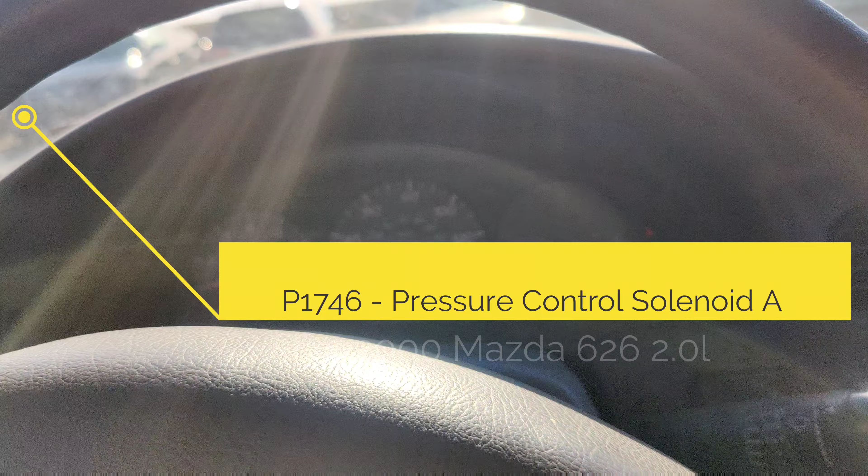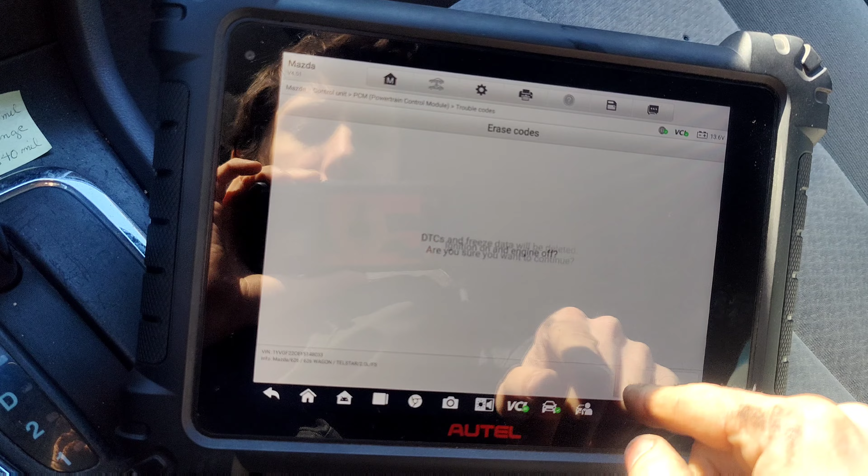Got this 2000 Mazda 626 and it got this P1746. I want to clear this code. This circuit open. I was doing some research online and I think this can be caused by a shifter issue. Well, not shifter, but like a position issue. Let's see.

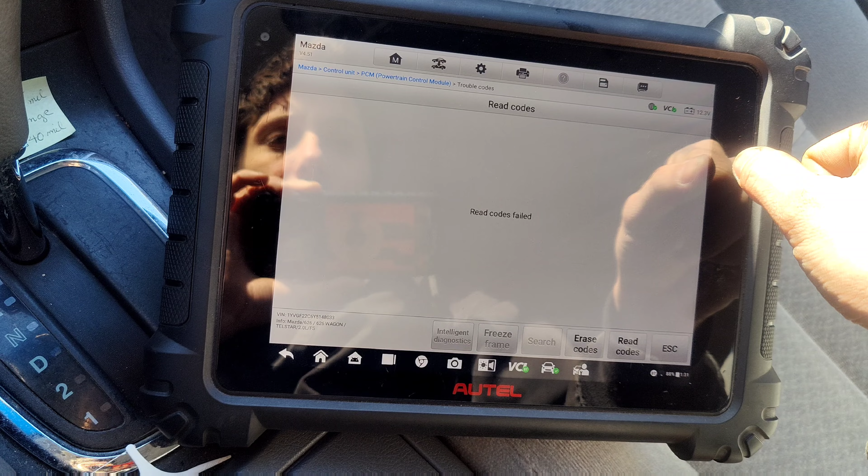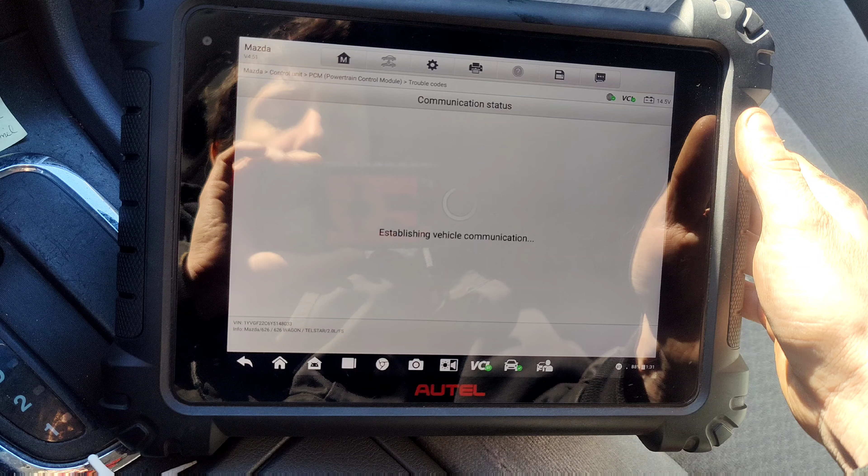Why did that fail? Oh, read codes failed. Let's see. That's weird. Let's try this again. Maybe I'll have to change scan tools. That's weird.

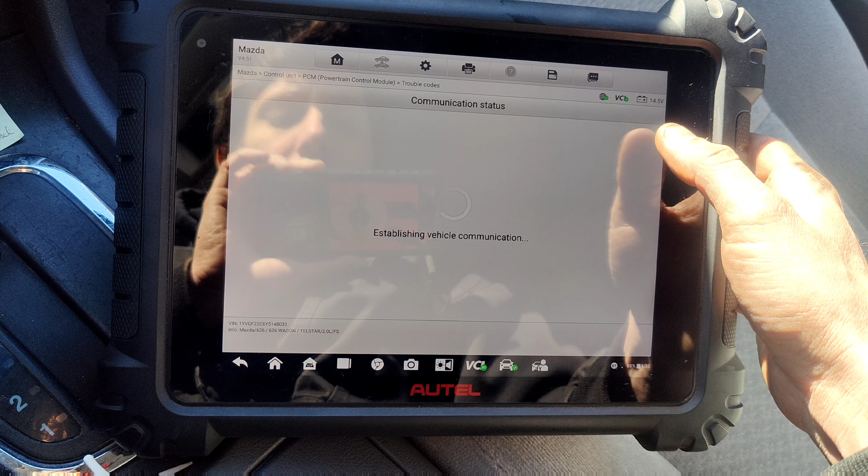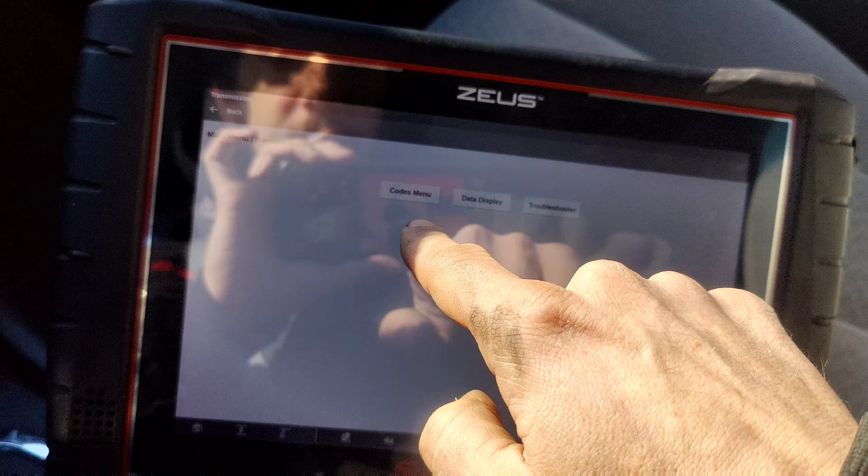Okay, let me change to the Snap-on. Snap-on actually gives me transmission. So it says no codes are set in the transmission. Just go back, check the engine. Codes. Memory codes. No codes. Okay, sorry about that. You guys are gonna have a glare because the screen's so reflective on these.

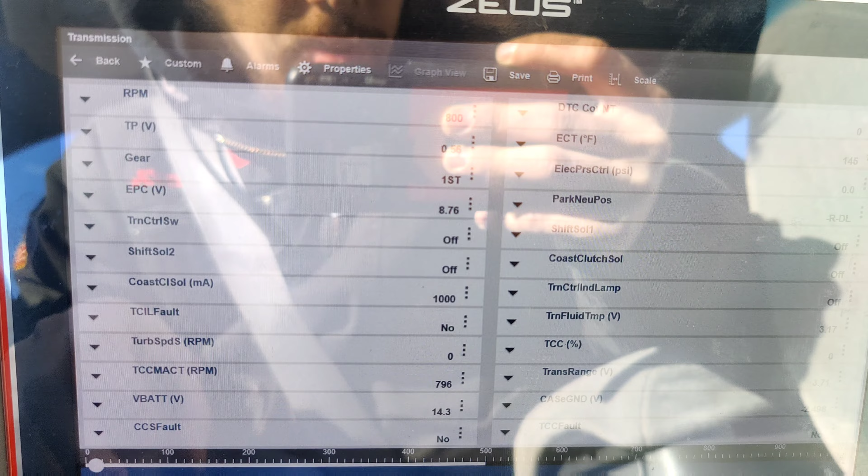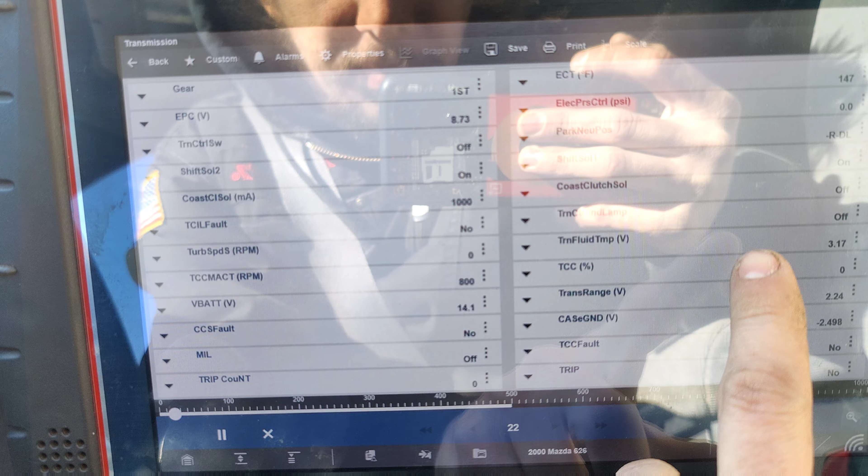Let's just go back. Let's go to transmission. Data. Let's see. Focus. I want to log the range switch if we can see it. Park neutral. Okay, so it does show that, let's see. There is a trans range voltage right here.

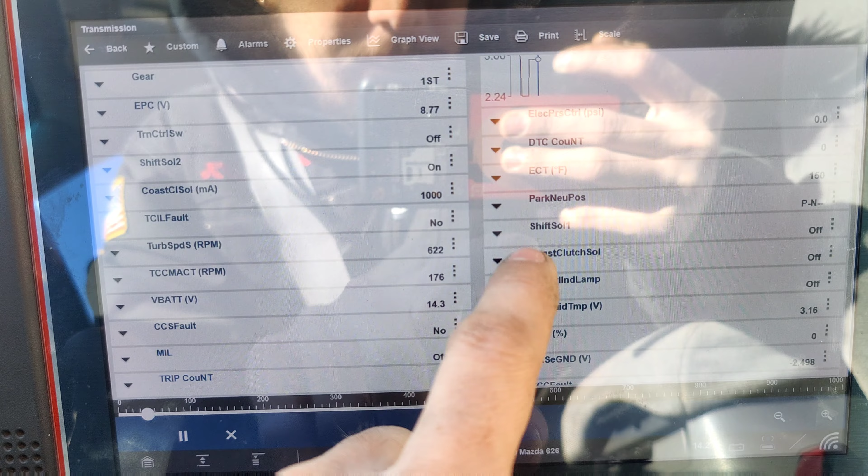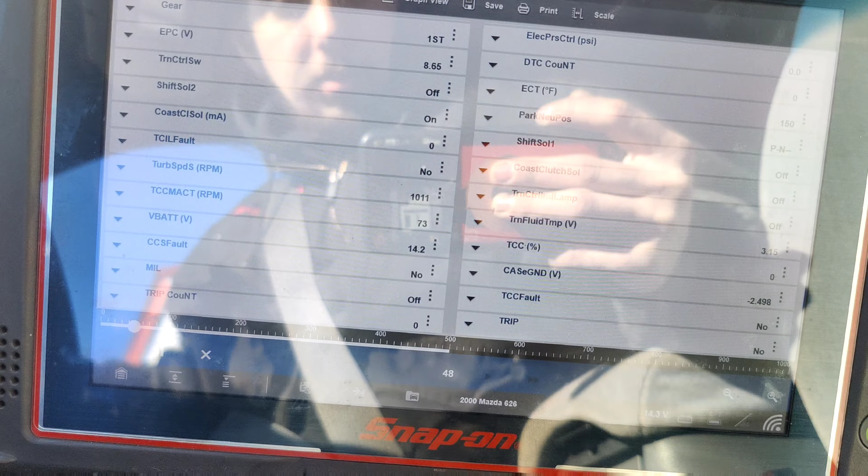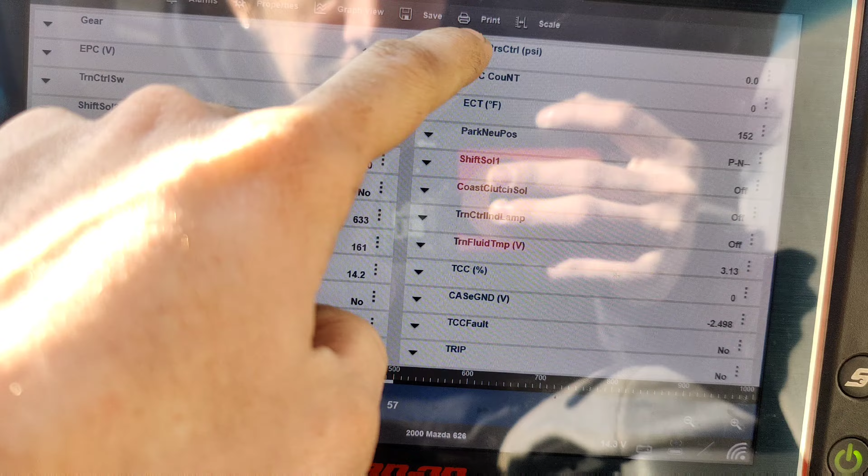I don't know. I'd kind of like to know what this case ground voltage is. Like, is that the ground of the trans? Like, why is that 2.5 volts? Okay, so I'm gonna take this for a ride. I'm gonna see if I can get it to act up.

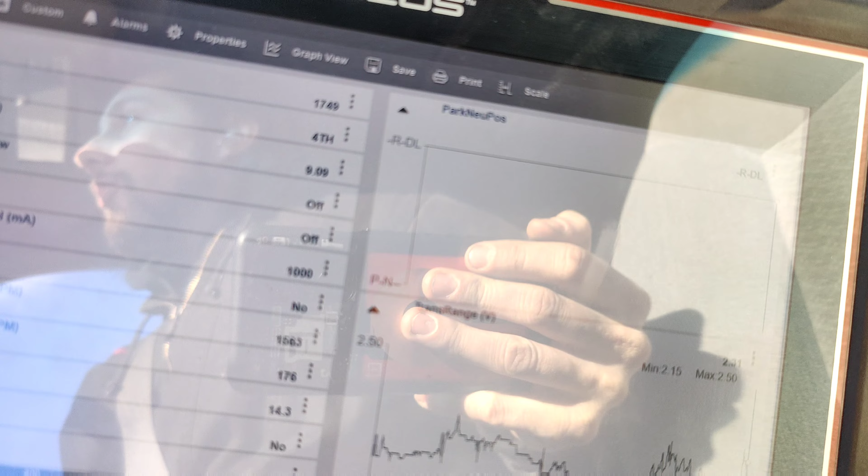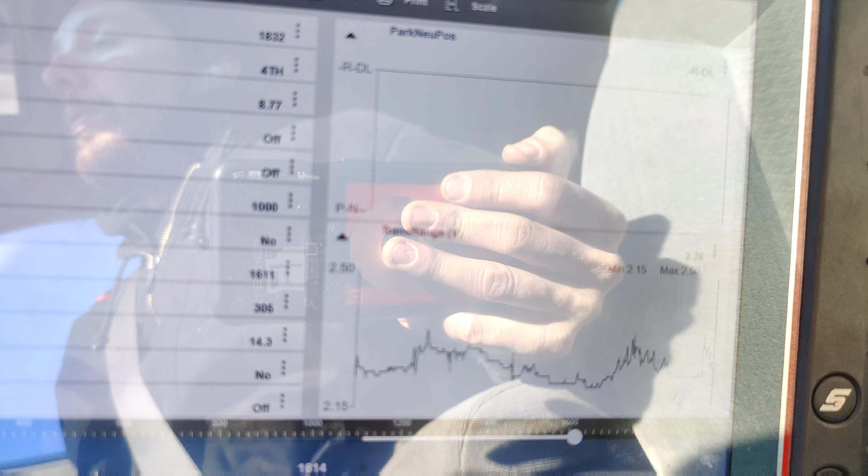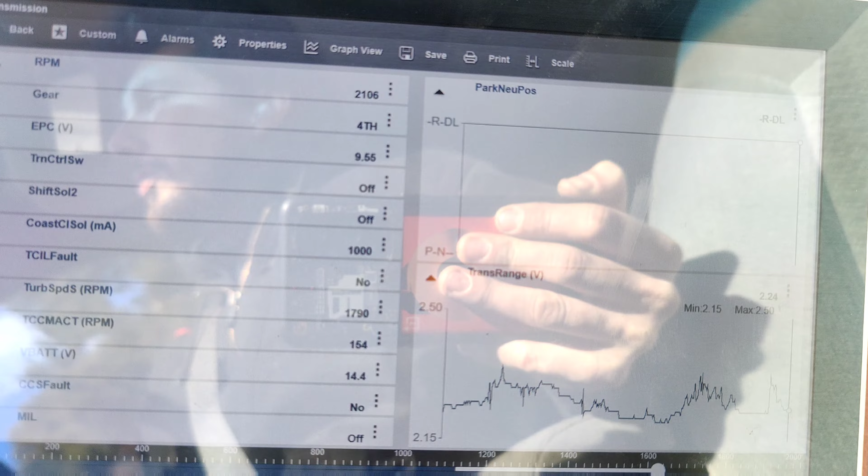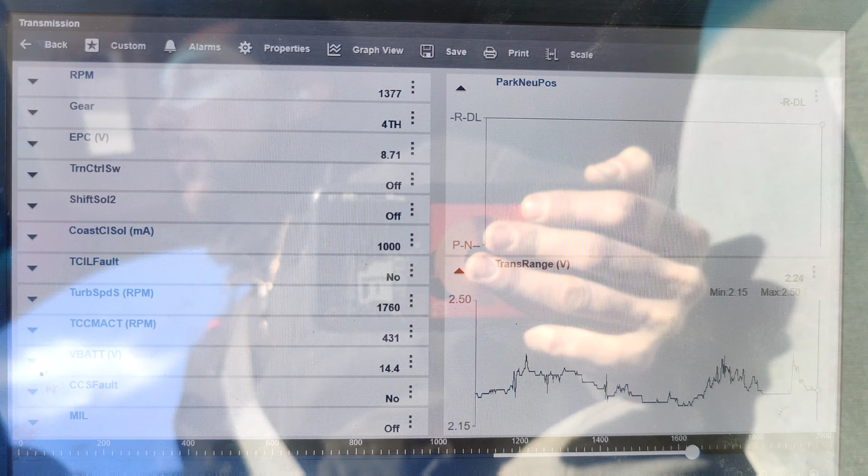Been driving. The sensor has been jumping all over the place because we started at 2.4, 2.5. It's been going down to like 2.15. I'll have to show you guys this, but you can see it just jumps all over the place, and that's the range sensor voltage. So I'm wondering if this thing acts up when it's really hot. I think I'm gonna let it sit and idle at the shop, but I'm wondering if that's his problem, and I wonder if it causes lockup issues or something. I do want to save this when I get back to the shop, but you can see how it just bounces all around.

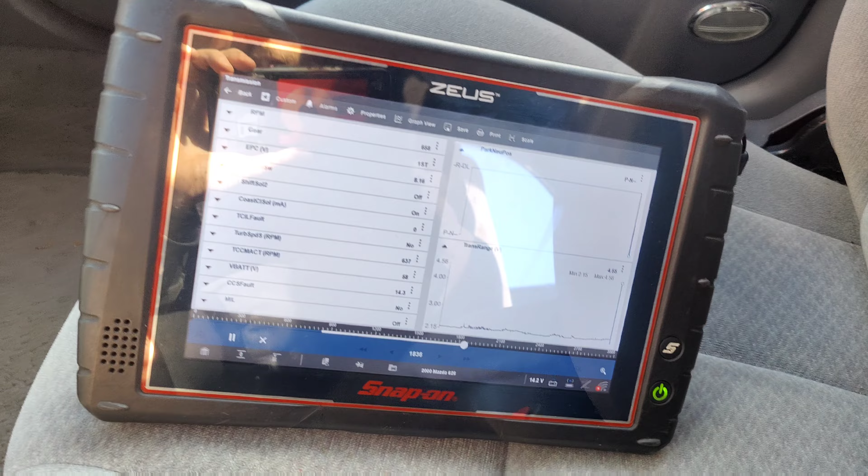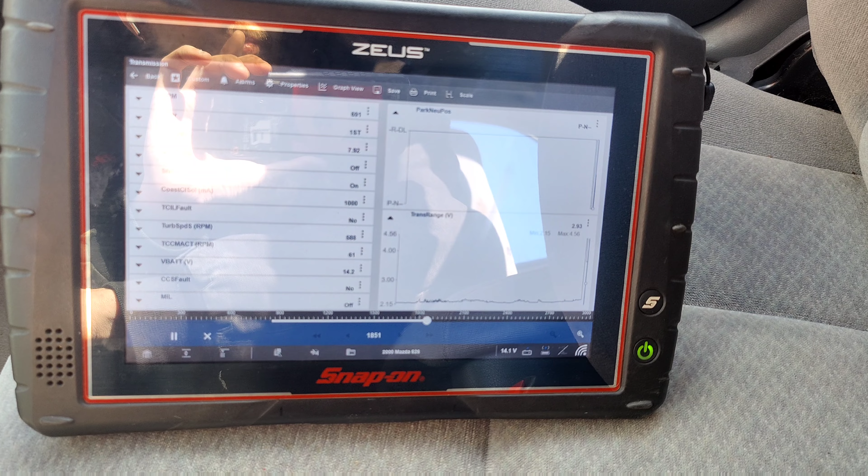Okay guys, so we're back at the shop. Let's put it in park. Look at that. 4 volts. It's 4.55, okay? So we're going to reverse, 3.71. Neutral, 2.93. Drive, 2.21. Let's go to second. First. So there's a 1 volt difference in each one.

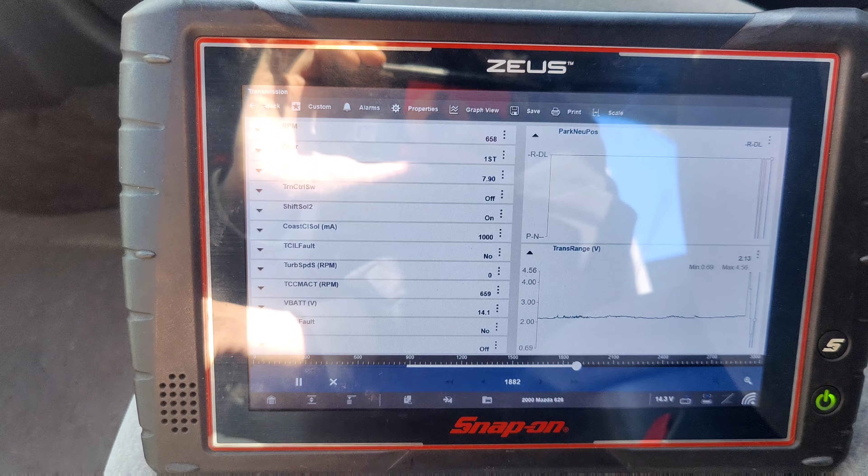Look at that. Look at our range switch. I'm in drive. And does that say drive low? Or is that normal? I guess maybe it says drive low. Oh yeah, I guess it does. Well, I'm wondering if this is a problem. I gotta see what our voltages are supposed to be.

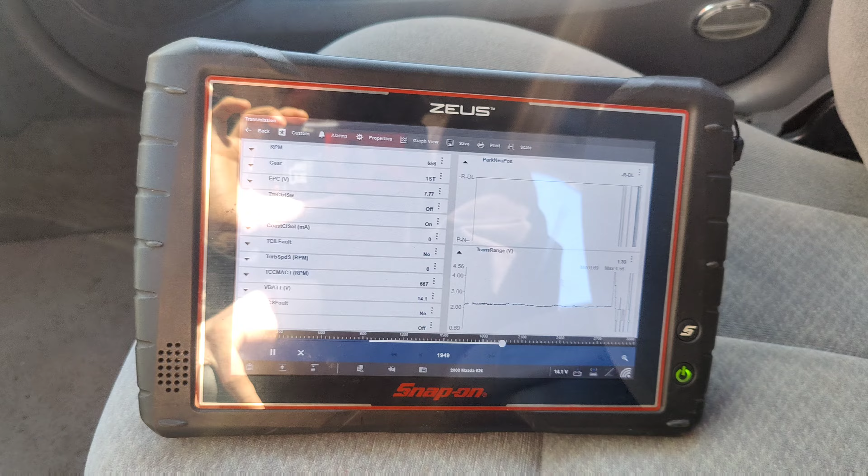I like that. I'm gonna let this sit out here, and we'll see. I'm gonna see if I find any information. Let this hot soak, and then we'll take it for another drive.

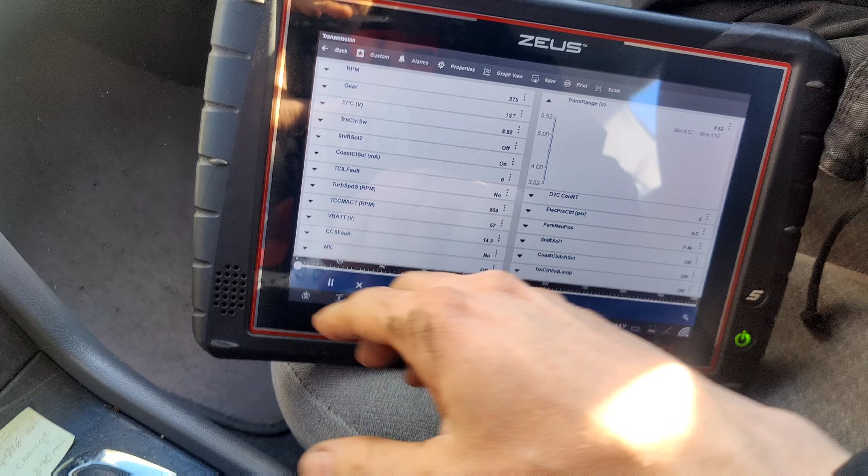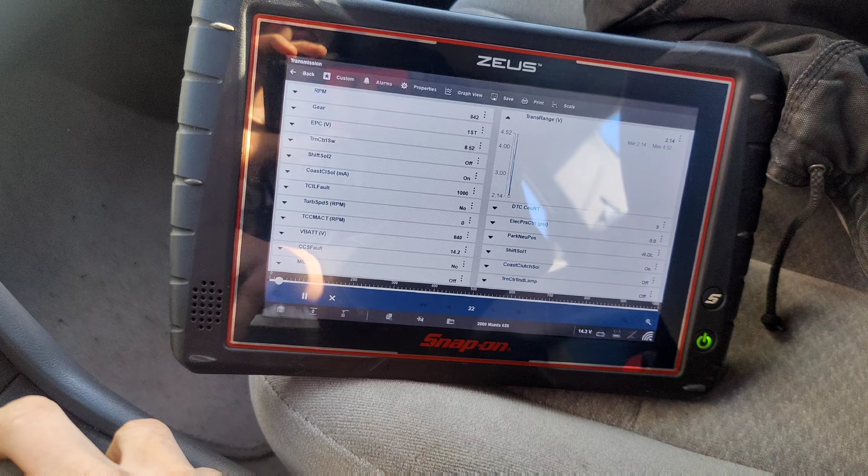So I was inside eating. Just got out. Just started the car up. I just want to see what our data PIDs say. You can see the car's kind of cold. Range voltage 4.52. Let's get reverse, 3.71. Drive. Look at that. Oh, that's neutral, 2.93. Drive is 2.14. So we're actually lower now than what we were before.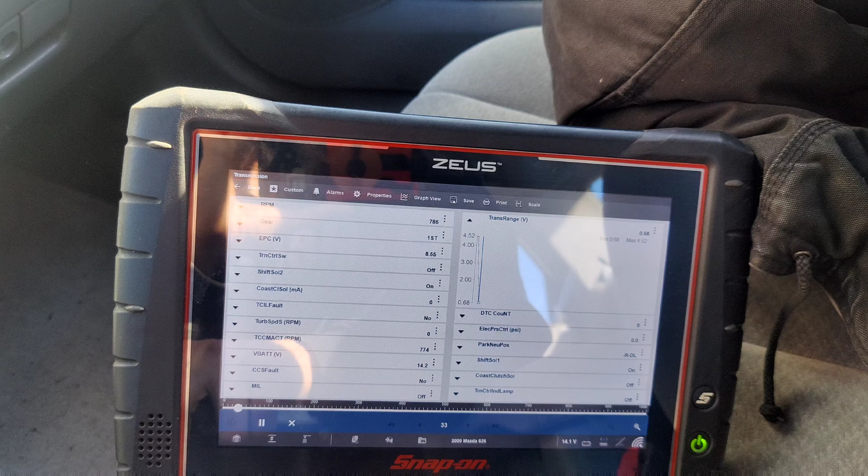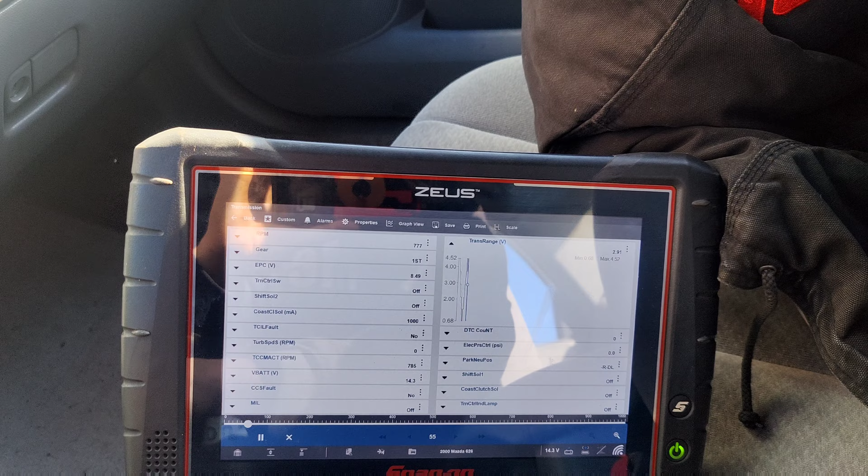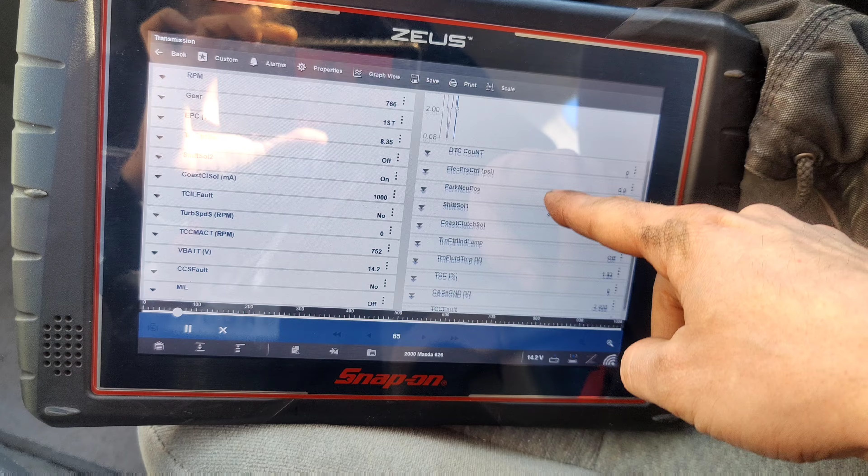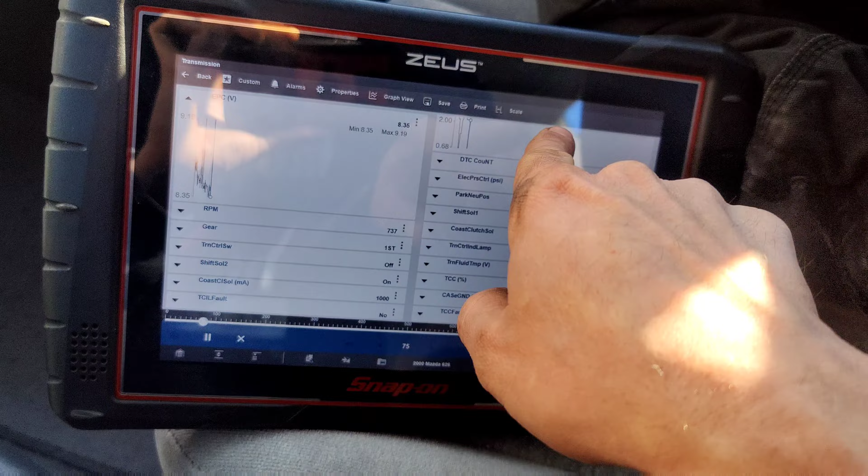I'm going to say that this is reading correctly now. And I'm going to say that it wasn't reading correctly earlier, because this looks way better. So we're going to go for a ride here. We'll see what happens. Now I do want to look at something, because the comments were this EPC voltage gets erratic when the range switch gets erratic. So I'm going to drive this and we'll see what happens here.

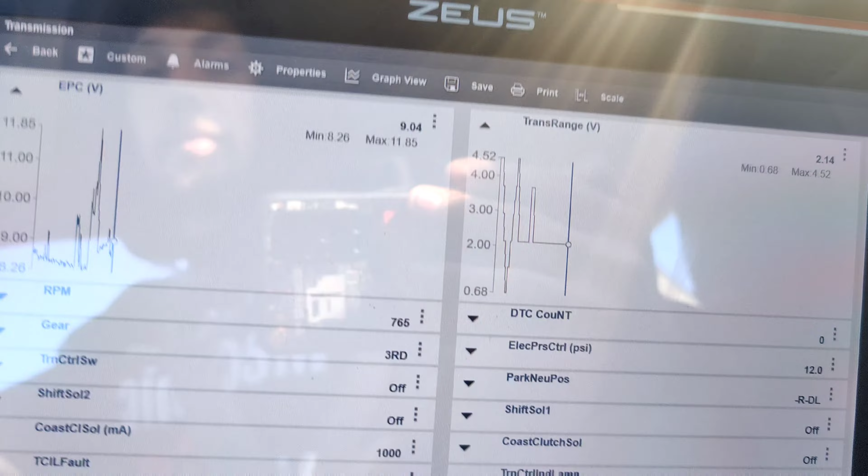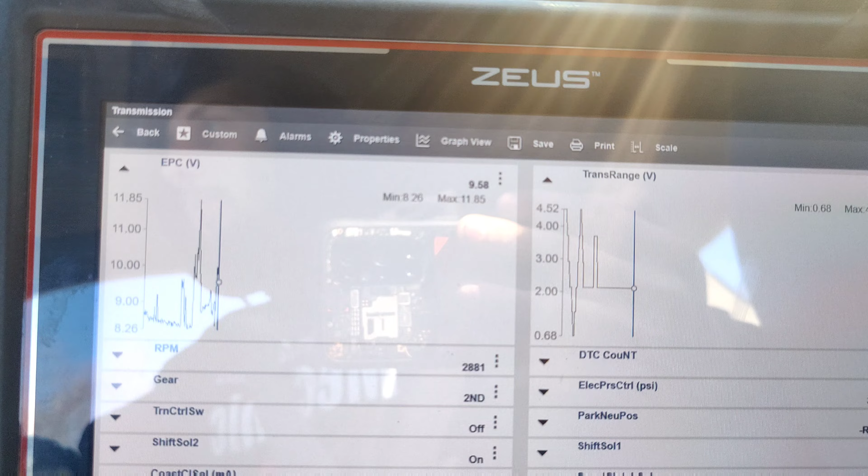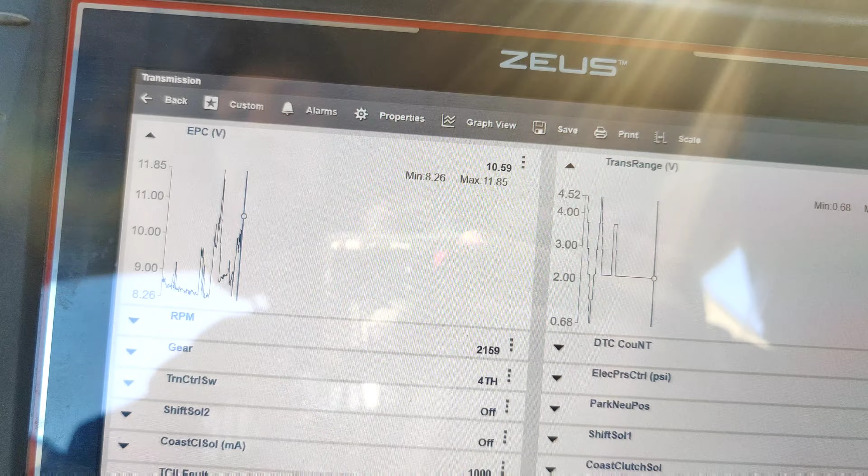Right now I started driving, range switch is dead on, but it wasn't earlier, which I think is interesting. So I'm going to keep driving and we'll see if this thing starts acting up and what it does to this, because I think they said the EPC voltage will change and then our pressure will change for our trans. Now I would want to limit the data PIDs, but I want to see what actually happens with this trans if we can log it, because we saw the issues before with the range switch. So if we can see how it's affecting the rest of the trans, that'd be interesting.

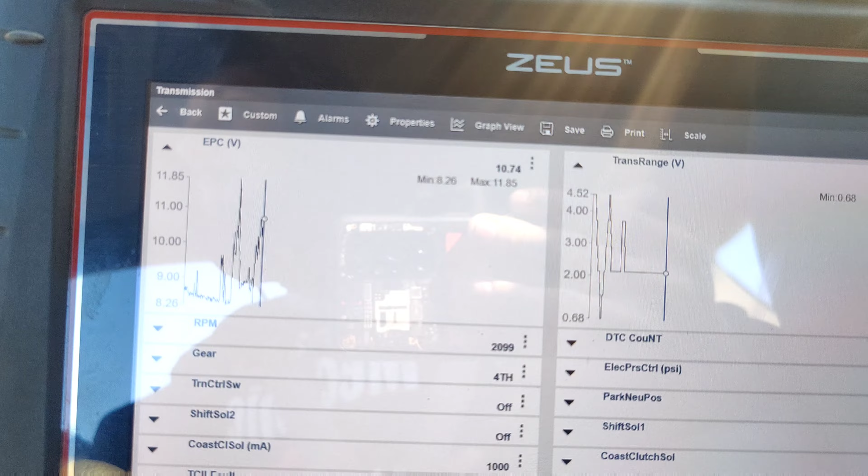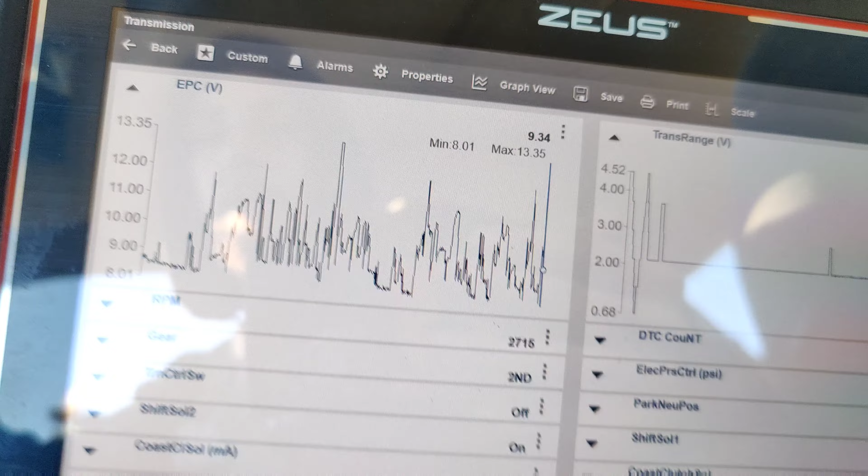So we're driving back. The voltages are not acting up on this trip, so I'm going to get a new range sensor, put it in here. The voltages are supposed to be 2.1, which we're pretty much at when we're in drive, and we were seeing 2.5 before. So I think there's definitely something wrong with the range sensor.

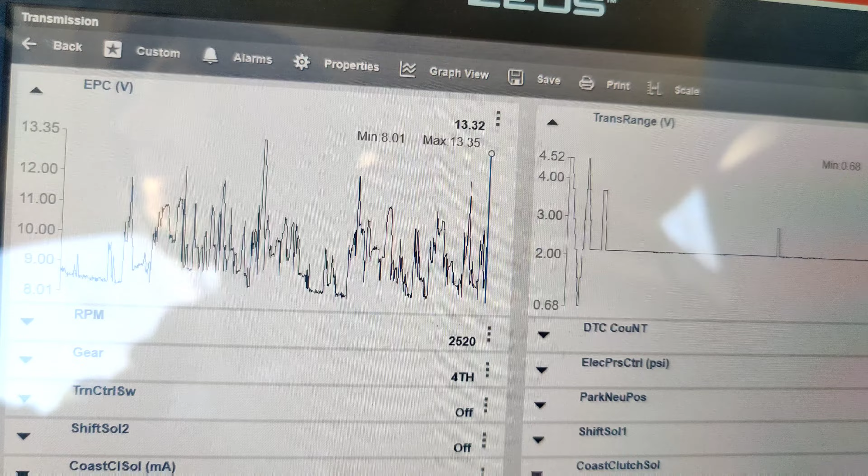Our voltages are correct right now, what they're supposed to be. So we'll get a new range sensor in here, and this should probably eliminate his problem, because right now it feels like it's shifting fine. I want to look at our log, see what our EPC voltage was doing before. But my friend also looked on Identifix for me, and there's a whole bunch of cases of this same issue.

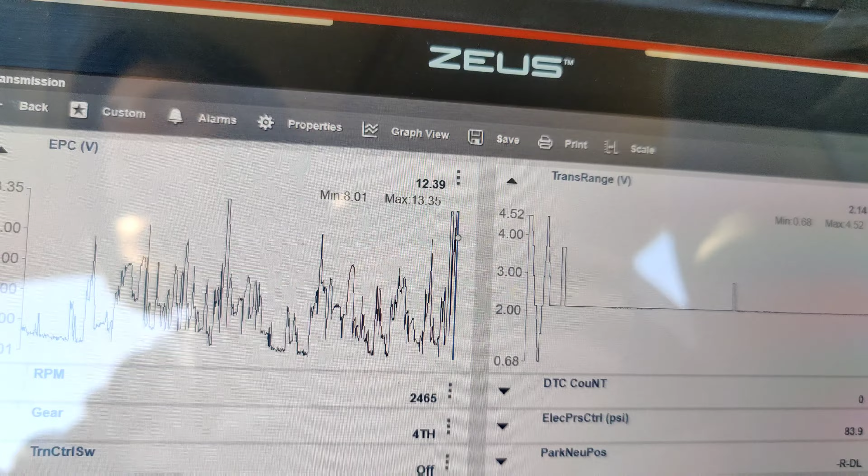I wanted to see if there were any voltages, because all they give you is resistance pins in the service information, or resistance values. So you'd have to measure current, or take the sensor out and measure the resistance of each spot. That's the only way. So it's hard to do that while it's acting up. Because if you knew how much current it drew, then you could do a calculation.

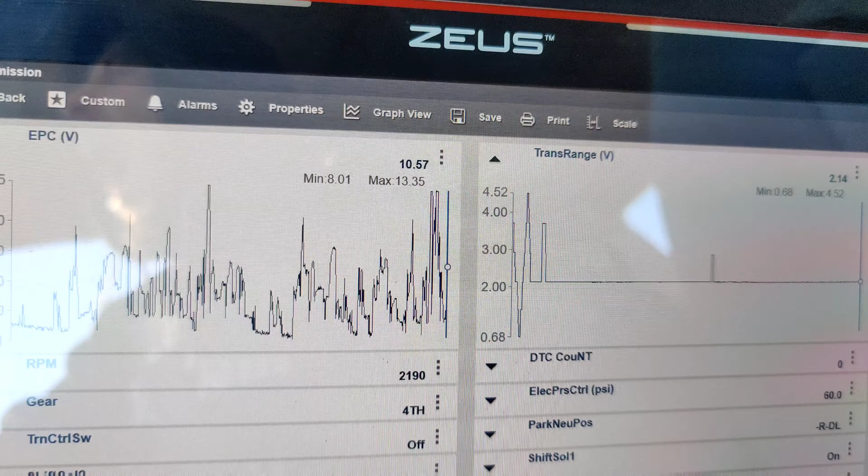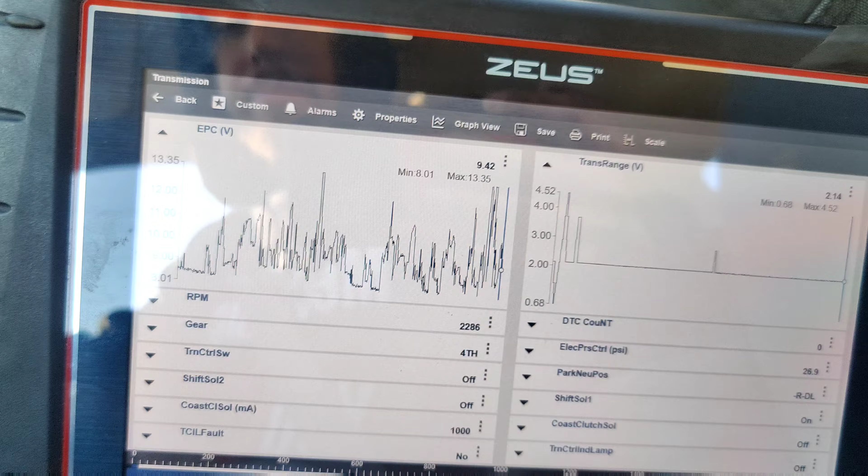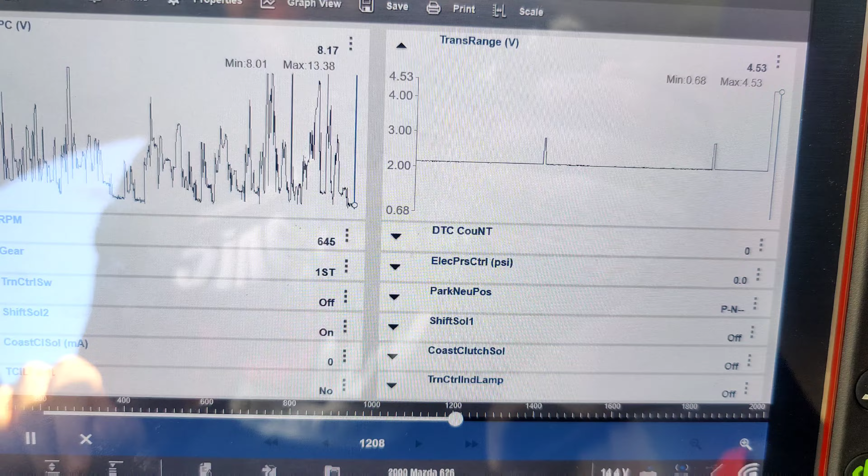So I'm assuming it probably has a bad contact or something in there, or a cold solder joint. That's why it was acting up, and now that it got hot, it's not acting up. Okay, so we're back. It didn't act up, so I'm going to save this. Those spikes you see there were just me putting it in neutral, trying to see if I could get it to act up. So I'm going to go inside. We'll look at our data, and we'll see if it shows anything when I have the recording of it acting up from previously.

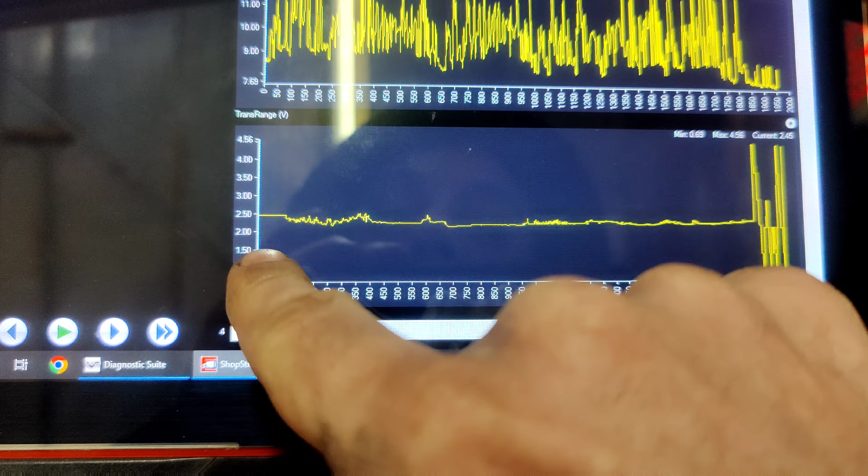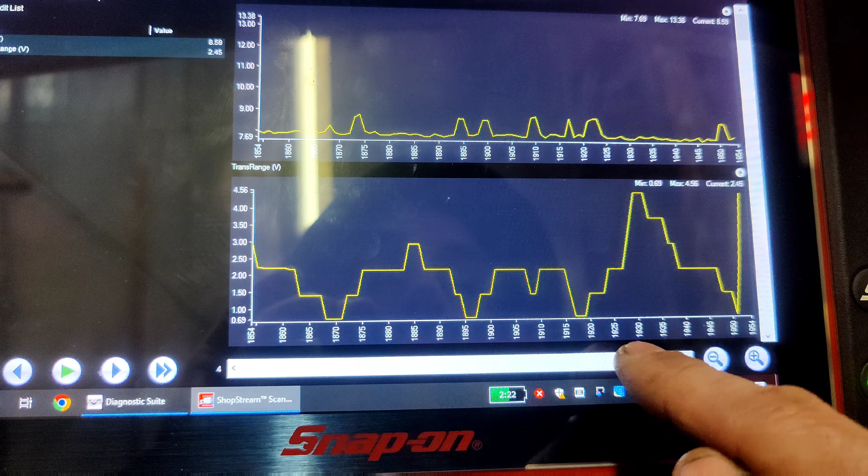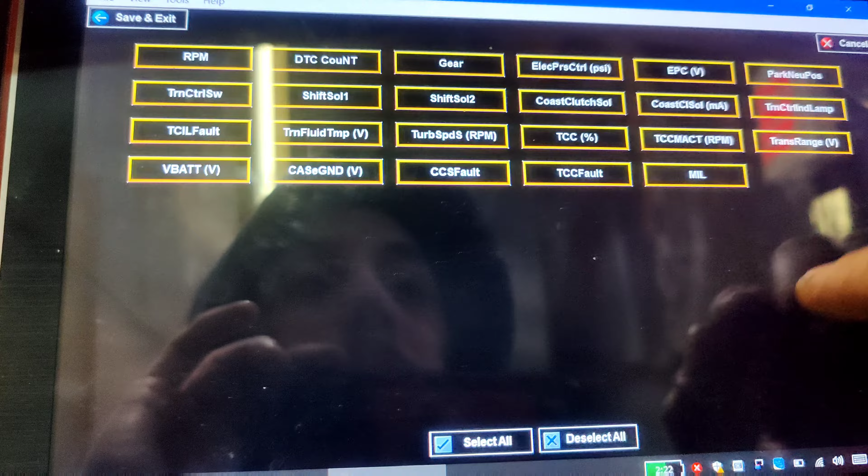Okay guys, for some reason the range switch did not save all the voltages, but look at that. We were at 2.45 most of the trip, and then, I don't know if it started acting up down here. No, I don't think it started acting up down here. For whatever reason, it didn't save any of my data, and I don't know why. It's not making any sense. So if I go under custom list here and we edit this, deselect, like we could see it on my scan tool while I was driving, and it should have saved it.

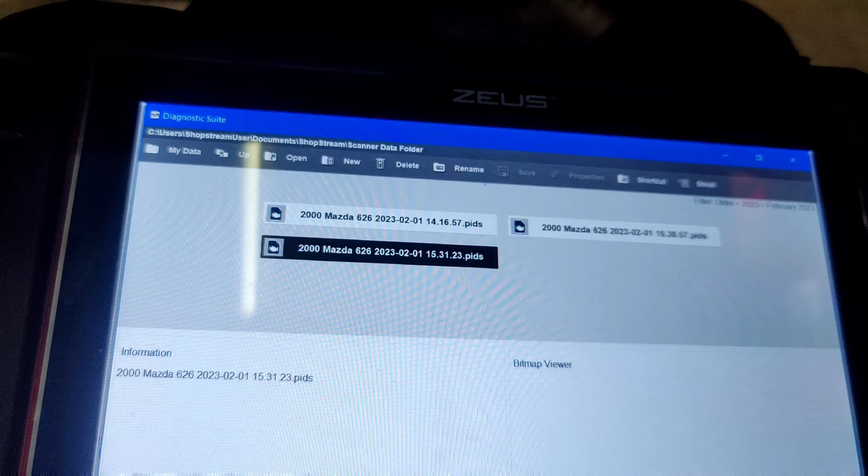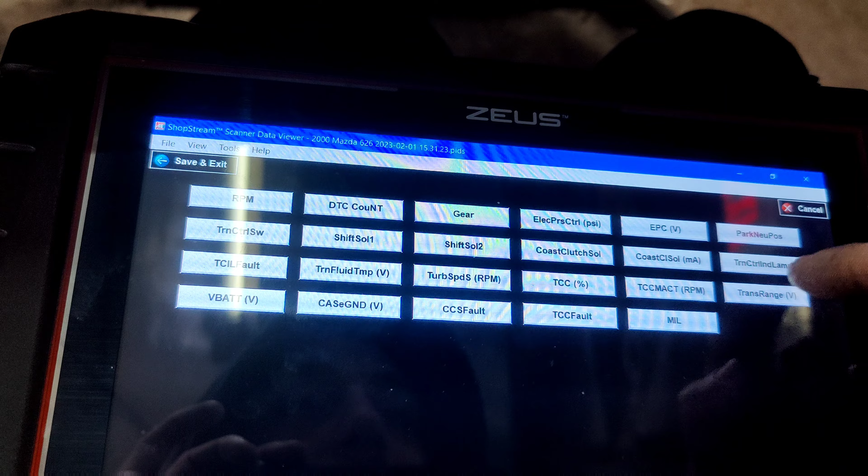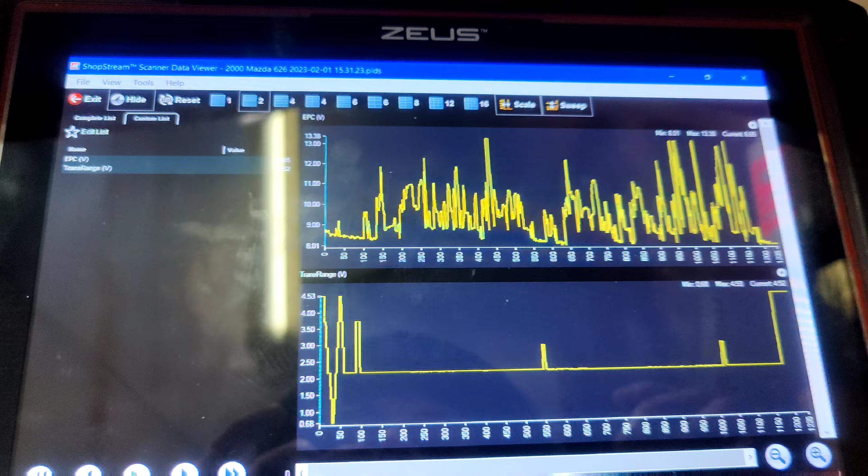I just don't understand. And out there, you'll see where it was acting up. I don't understand why it didn't save my drive. Let's see, custom, edit. Let's try this one. Save. I don't know. We saw it earlier, so I'm just gonna put a new range switch on and we'll take it for a ride and we'll see if everything's good then.

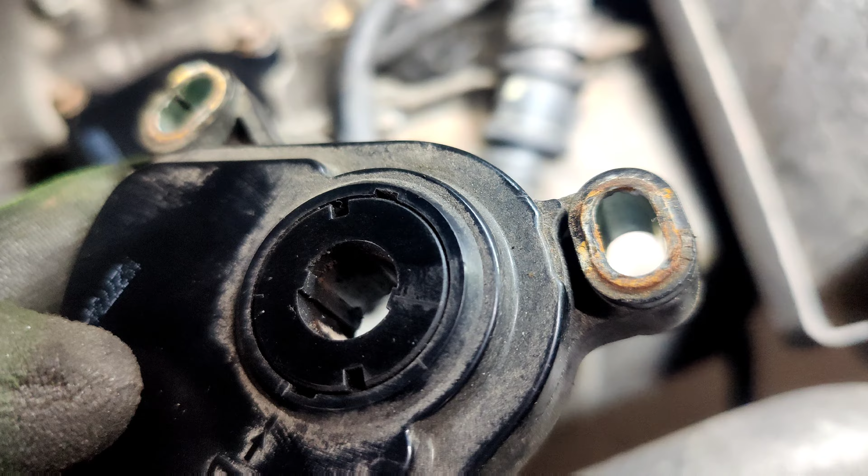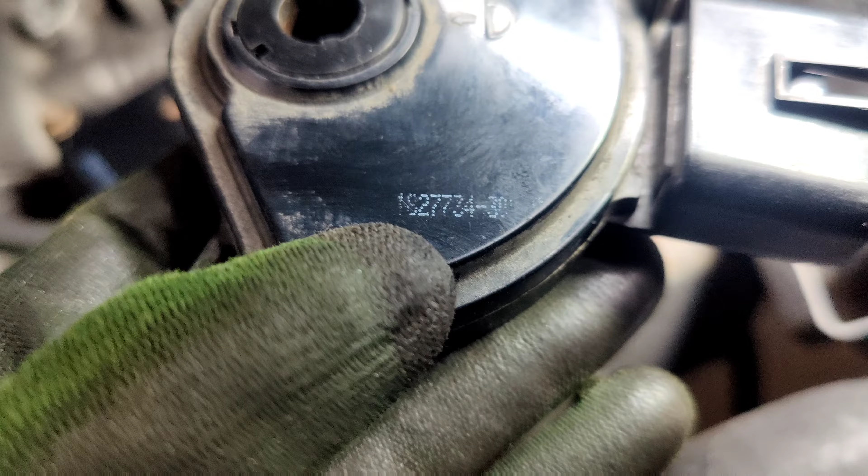Hey guys, put a new range switch in. See this one, how it's corroded around these edges? So this may have got water in it or something, or just started dying from old age. See it? I don't know if that's an OEM part number or not. But got the new one in here. I centered it up for a drive, so I tightened it all down.

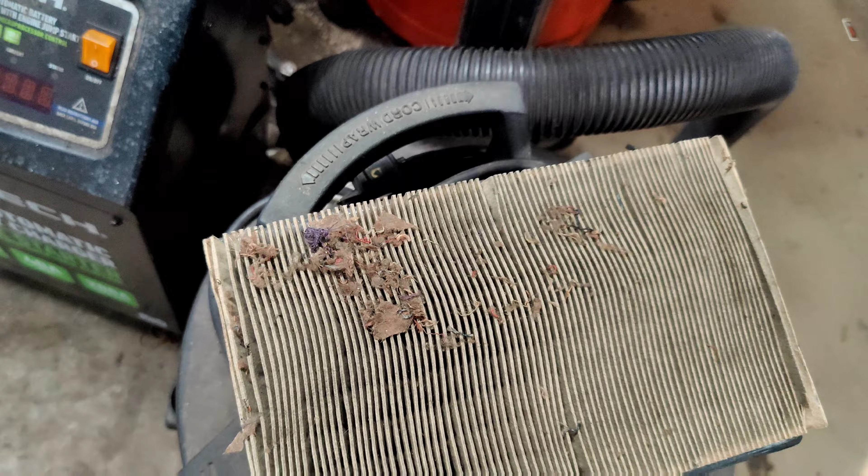So we're gonna get everything back together, and then we've also got a new air filter coming because this air filter is completely clogged. So we'll get this all cleaned out. We'll put it all back together. Then we'll take it for a test drive and confirm that it's fixed.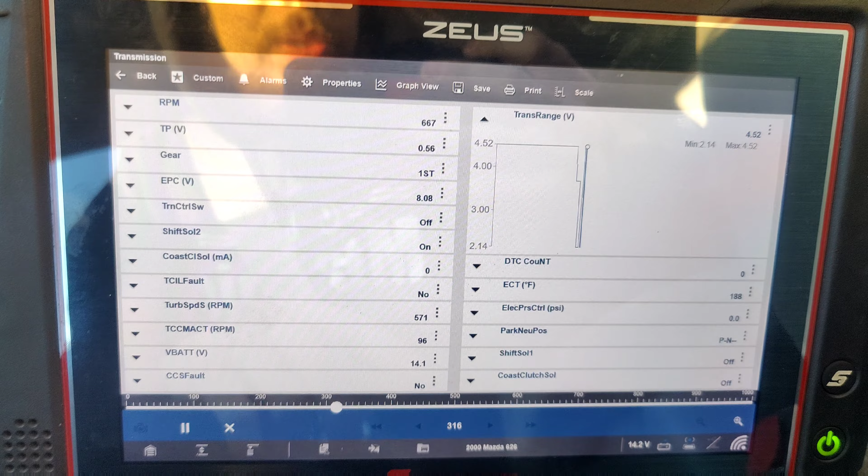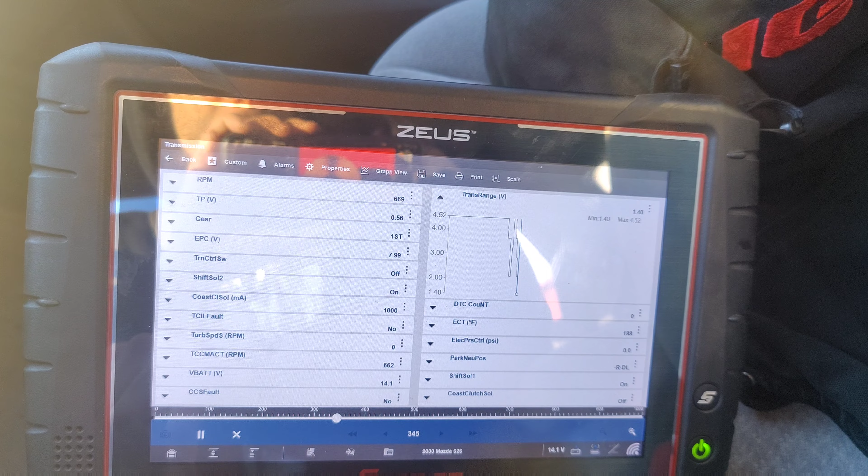Guys, just want to get a baseline. So right now in park, we're at 4.52 volts. Go to reverse. 3.71. Neutral. 2.91. Drive. 2.14. Second. 1.4. And then first, 0.68, 0.69. So I'm good with that. So I'm gonna take this for a drive, and we'll see what happens here.

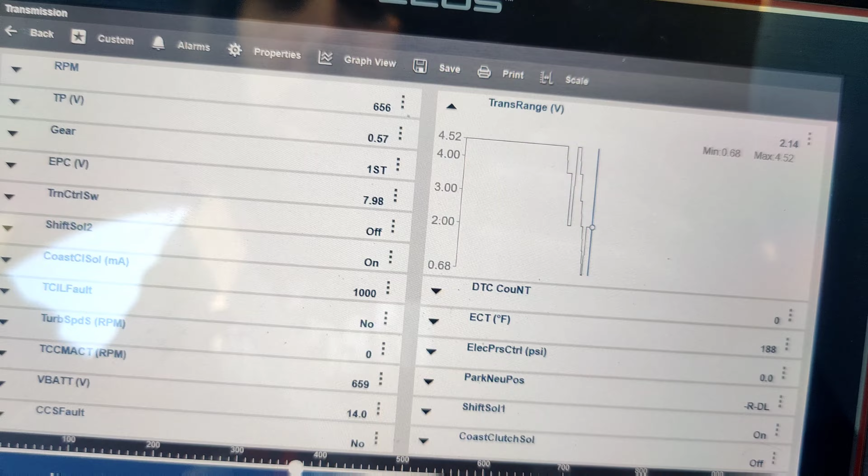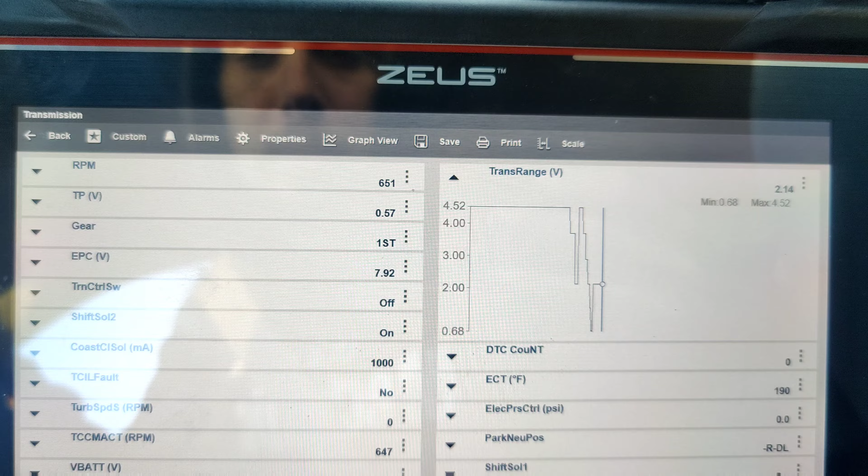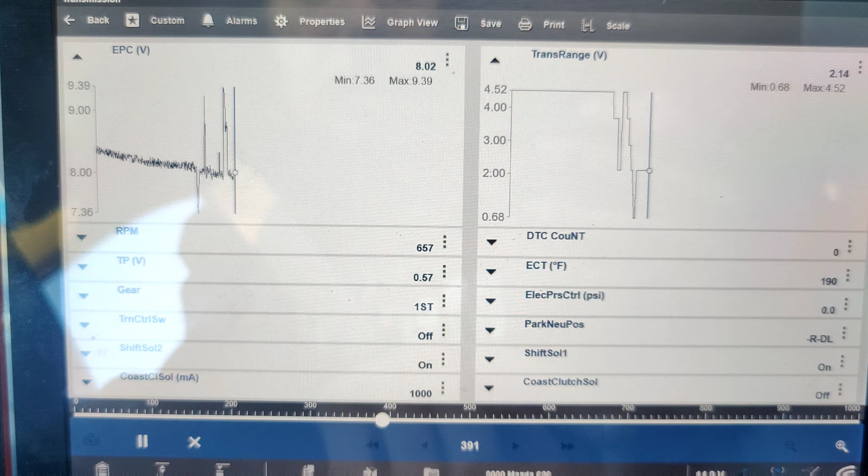I think we'll be good though. Hopefully it records this time. If not, I'm going to show you guys anyway what it looks like after I go for the drive. But I'm pretty sure that was his issue. And I think once it warmed up, it started working. I also fixed his battery terminal. His battery terminal wasn't the best. He needs new ones, but we'll just look at these while driving, and hopefully this works. Oh, you know what? Do we only have a 1,000 frame buffer? Well, I'll see what happens here once this fills up.

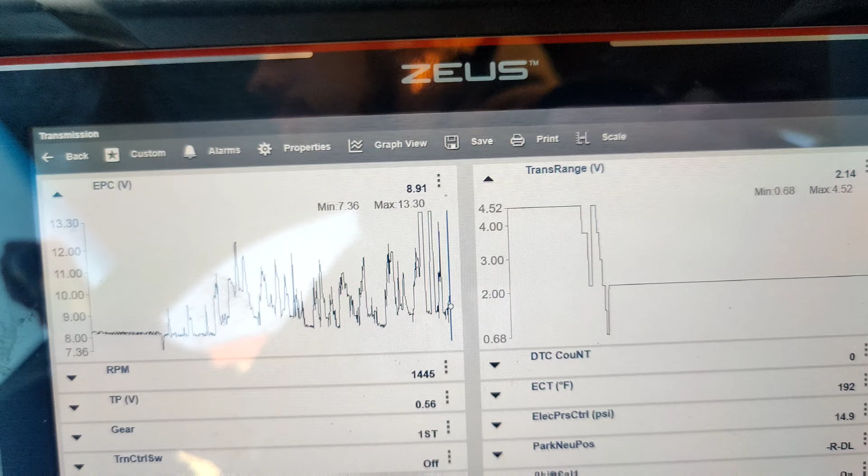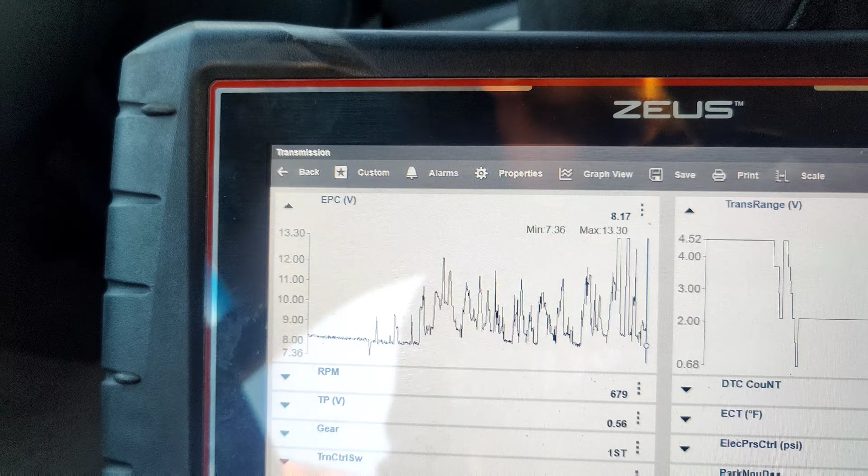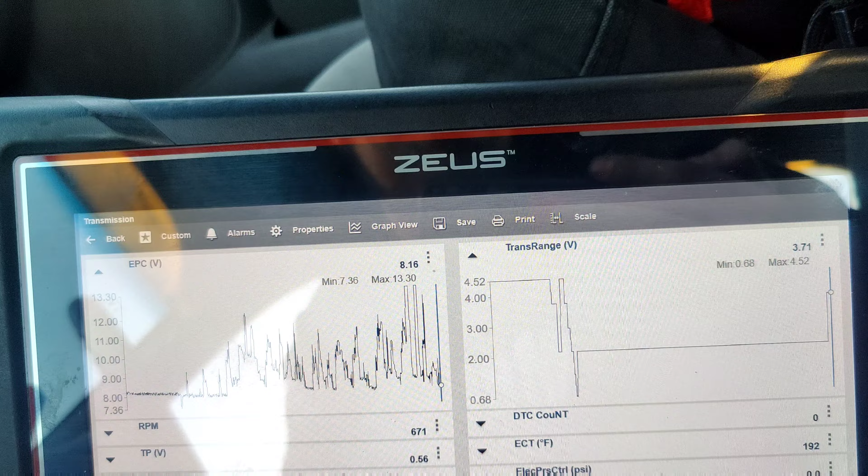We're pulling back in the shop, and not really seeing any issues anymore. We didn't even have a flinch of our range sensor. Not even a blip of difference. Before, we saw at least 1/100th of a volt change. It's been rock solid now. So I'm really happy with this. Let's go in reverse. Let's see. Just park the car real quick. Look at that. And we'll go in park. So I'm calling this good. I hope this saved everything this time.